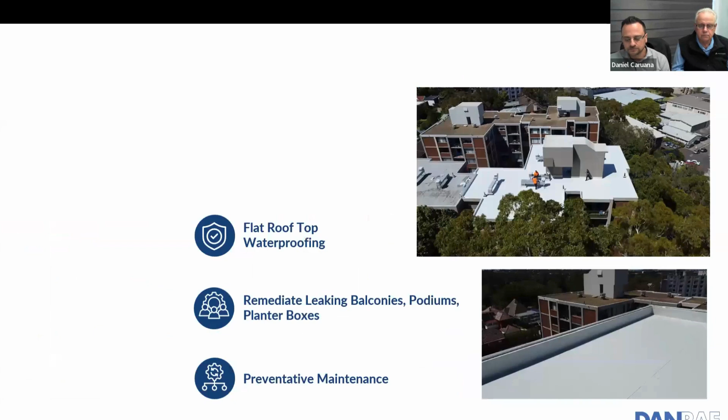And we work generally in New South Wales, Canberra, now Melbourne, and we work across various industries: strata, commercial, and government. Yeah, so I've just been through that. Adding to that, we also do preventative maintenance as well. So we do regular checks on membraned roofs to ensure their compliance and that long-term warranty periods are still viable.

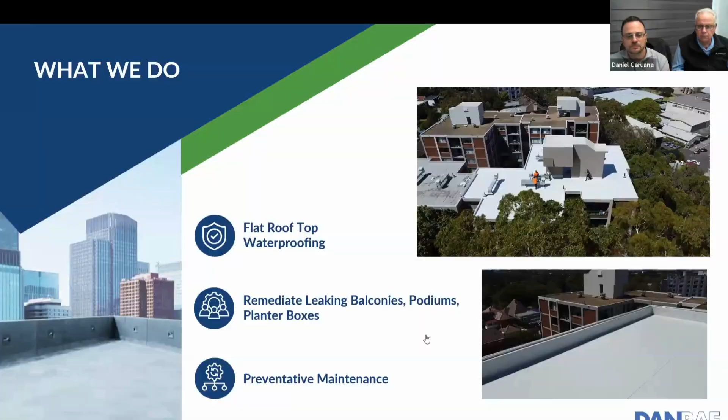My special guest today is Mr. Ron Caruana. If you haven't noticed already, it's actually my father who founded the company. G'day, Ron. How are you all? I'll let Ron give the quick intro. Yeah, as Daniel mentioned, I'm Daniel's father. I started Dan Rae originally with my wife, and as we went along, Daniel came on board, and Renee, my daughter, as well.

So they've actually taken over Dan Rae and are running with it now, and I've branched out with another company called Waterproofing Compliance, where we look into new buildings and remedial buildings, but make sure that new buildings follow the new act and comply with both the Australian waterproofing standards and the NCC. And then we sometimes get involved with remedial work where we investigate issues on existing buildings. I've been in the game for quite a while, so I know quite a bit of the problems that happen on buildings.

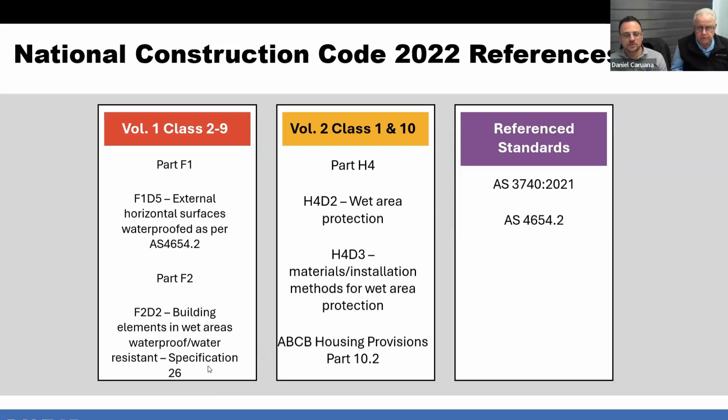Externally, correct. So to go deeper into that, what are the specific standards in waterproofing? As mentioned, AS 3740 is the internal standard for design and installation of internal wet areas, right? So bathrooms, laundry, etc., all your wet areas internally.

AS 4858 is actually the standard to which a membrane must be tested for use in internal areas. Why that's important is every membrane must be tested to a certain class, and I'll cover that in a minute, of essentially how much it stretches, the extensibility of a membrane, and whether it can be used in an internal area.

And they also do tests on the actual membranes themselves, chemical tests that could happen in a bathroom, for example in the shower, using bleaches and things like that, and how they withstand those typical normal use areas. Yep. And then you've got AS 4654.1, which is similar. So it's the standard that the materials or the membranes are tested to for use externally above ground.

And then you've got AS 4654.2, which is the design and installation for a contractor to install those membranes. At the moment, there's no Australian standard for below ground. However, they're looking at adopting the British standard 8102 for below ground waterproofing.

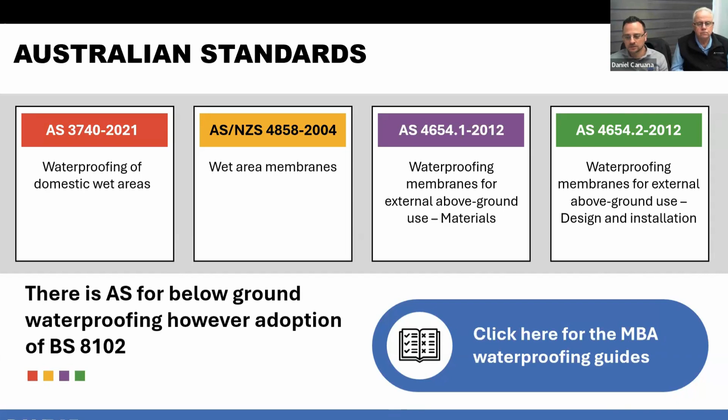Okay, so in the standards, what are the terms used in regard to waterproofing? First one, there's been misconception around interchanging of certain terms, and I wanted to put some clarity around these terms. So a waterproof material is one that does not allow moisture to penetrate that material, as opposed to water resistant, which doesn't degrade if water enters the material.

The reason I bring this up is that concrete is considered to be water resistant. A lot of the time in construction that term is interchangeably used with certain substrates, so it's important to note the difference. And then the waterproofing system is a combination of the building system to ensure there's a waterproof barrier. So that's important as well. It's not just the membrane itself. It's actually a full design of the system.

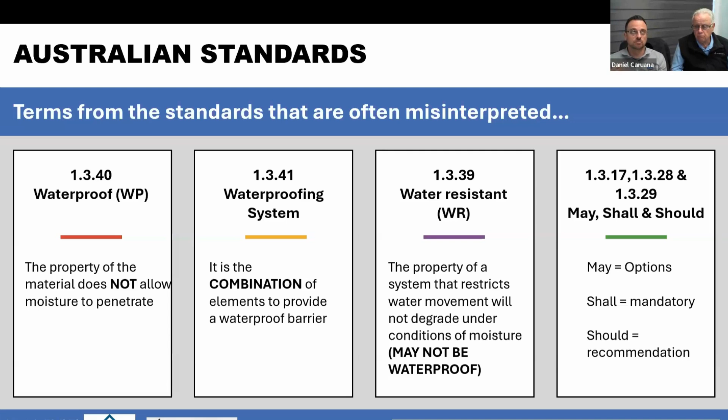And then there are terms that are also used, which are may, shall, and should. For example, you may get a sentence that uses either of those terms, and that essentially indicates whether it's an option, mandatory, or a recommendation. An example would be in the external AS 4654 standard, it says that there shall not be ponding on a roof or on a substrate, but it should have a 1 to 100 fall. That's just one example. So in short, it's important that those terms are interpreted correctly.

Yeah, so this slide shows the classes of membrane and their extensibility. Do you want to talk to that one about different types? Yeah, well, generally the membranes have their actual class ratings, right? So when you pick a membrane for a particular job, it's got its class rating on it, depending where it's going to be used. And basically, they rely on the elongation, in other words, how much it can stretch before it actually tears or cracks.

Okay, and what it is too, the lower the class, the more corner fillets you need to have, different sizes that will allow the membrane to work better. For example, the liquid membranes do not like a 90-degree transition between the horizontal and vertical. So it's very important to look at what class membrane you've got and how these are treated.

In some cases, if you're getting a class 1, it's a pretty extensive corner fillet, up to about 75 mil I think it is on a class 1, which is tremendous. So some suppliers will recommend possibly using a bandage in the corner, and that will give them the flexibility they need in the corner to comply with their requirements. It's important that you look at that. And again, the different classes of membrane, which Daniel's got there on the side, the class 1s, 2, and the examples of them.

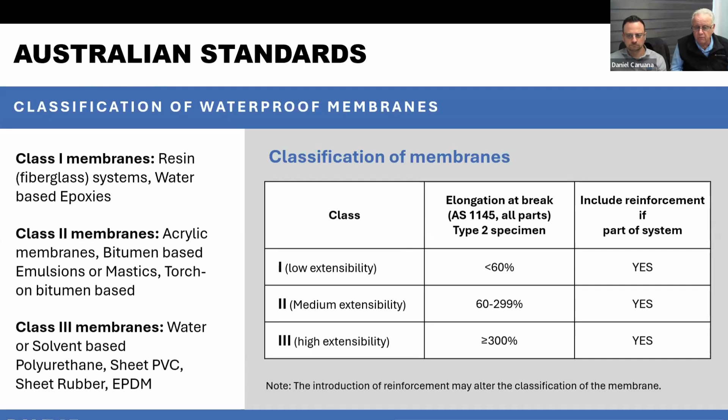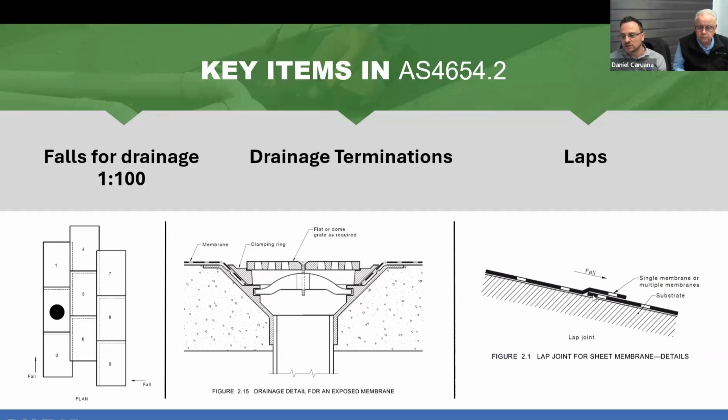It should be laid in a brick fashion, with the lap of the membrane falling towards the drain. And with drainage points, we find this is quite common on older buildings where they don't use a clamping style drain that actually clamps the membrane and pushes it against the substrate on the drain design. I've already mentioned the lap. So the fall should fall to the drain as well.

Terminations. This is a diagram out of the standard as well. For sheet membrane, this is a preferred termination where you essentially reglet cut into the vertical wall or parapet wall, and the membrane system is then inserted into that cut. As you can see here, this diagram has an overflashing. That can be done with certain membranes as well. Some membranes have a weldable profile that the membrane welds onto in that situation. Do you want any other comments on that?

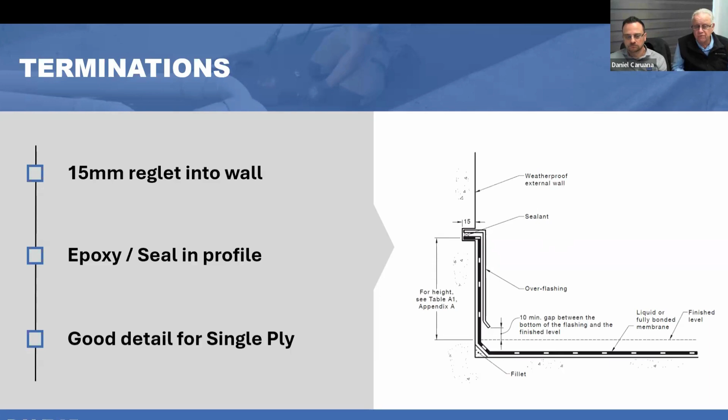Yeah, this is the preferred method because some terminations rely solely on sealants, and they've only got a lifespan sometimes of about 2 years, maybe 3. Yes, I'll show you this one. Yeah, that's the one I'm talking about. Sometimes they say not to cut into the wall, however, this type of pressure seal system relies extensively on the sealant. And as I mentioned, that's only got a lifespan of about 2 or 3 years generally, which means maintenance comes into it and you need to check them and redo them.

Yeah, so this detail from the standards is typically used on a torch-on, where the torch-on will turn up the wall, the profile is fixed to the torch-on, and then sealed off with a sealant. A common defect we see is actually the wrong sealant used on the membrane. For example, a polyurethane sealant, which is not ideal to be used with a bitumen membrane. And like Ron said, it's very reliant on the sealant as your main waterproofing barrier on the upturn.

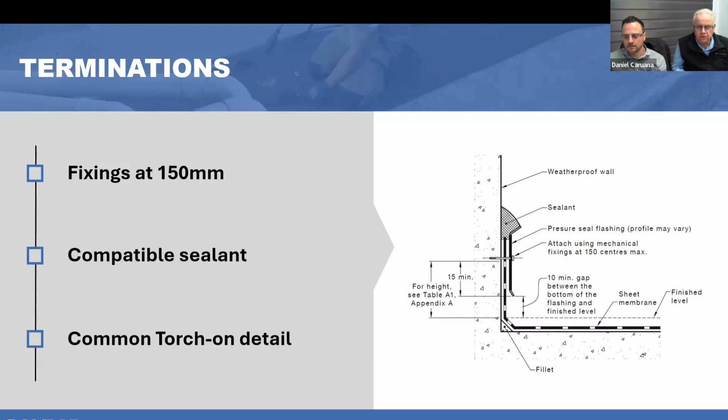Yeah, there's got to be a separation between the sealant and the torch-on. With torch-on being bitumen, they have a reaction. So you need to use the correct sealant for the correct membrane, basically.

Okay, balcony detail. A very common defect that we see on balconies is along the door threshold. The diagram on the left is straight out of the standards on what a typical membrane installation would be, as you can see by the dark dashed line there. Most waterproofing, unfortunately, only turns up the vertical face and doesn't go under the door threshold. In remediation situations, a lot of design consultants will ensure that the waterproofing turns up underneath the door threshold. That's why the doors have to come out.

So that would be the ideal detail. I've drawn the red line there. That's essentially where the common fault occurs, along that joint where a cold joint will form due to building movement. I don't know if you want to comment more. Yeah, on the door threshold, that fault Daniel's showing with the red line: some of the hobs are poured later. You can either have a hob that's poured in situ with the main slab or added after, and that's a common problem with the after effect, okay?

Because the hob moves and cracks, and if the membrane is not suitable, it will come through there. Another problem is the waterstop angle is now installed under standards, but it wasn't installed before. So if there's an issue or a problem with the door, it'll work in that area there. It'll leak through there.

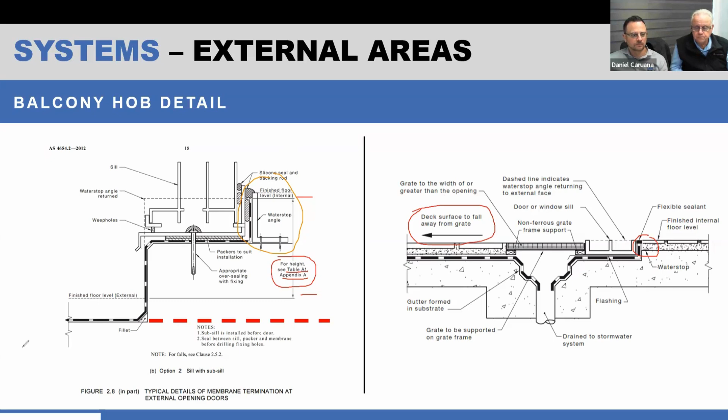Let me hopefully clear this. That's all right. Okay, planter boxes. Oh, let me just give it.

Planter boxes. So this is planter boxes. While they look nice, they're obviously a problem in a lot of apartments and apartment complexes. So this is straight out of the standard as well. And as a remedial contractor, and I'm sure Ron also, we've probably never seen a planter box designed this way. No, I don't think so. In an actual construction environment.

So one of the common things we see would be the issue of the soil height versus the membrane height. Often the membrane finishes below the soil height. We see that quite a lot, and obviously then you're getting moisture drawn into the parapet wall or the upturn. And we never see this design done either, where the membrane carries up and over and outside. But I don't know if you want to talk about how that's detailed correctly in a normal build. Well, yeah.

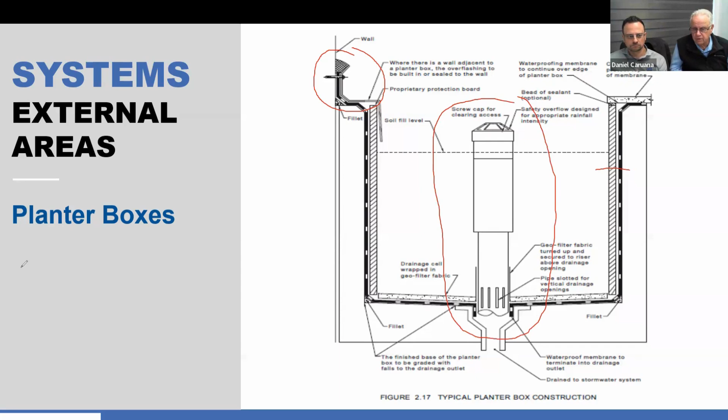Yep. Awesome. Okay. All right.

Internal wet areas. So specifically in internals, I want to reference a couple of the terms in the standard too, because these are new in the 2021 internal standard. They've increased the definitions of a lot of terms, which is actually really good. So for those that are new to liquid membrane and the terminology used around that, the dry film thickness is the finished thickness after the membrane cures.

There's a lot of misconception when applying liquid membrane. A lot of contractors aren't actually testing the thickness. That's in the built environment, new build especially. They're not getting the correct thickness when they've finished a liquid membrane installation, which is essentially what we test for.

When the contractor is actually applying the membrane, there's what they call a wet film thickness gauge, which they can use to test the application or do spot checks while they're applying the membrane. However, a lot of contractors don't use it or don't know how to use it properly, because a lot of the membranes

like, for example, a water-based membrane could have up to a 50% evaporation rate to get to the dry film thickness. So you might apply 1 millimeter thick wet, but it'll end up being 0.5 dry. And if the supplier wants a 1 millimeter finish, that means you need to apply basically 2 millimeters wet to get to the final thickness.

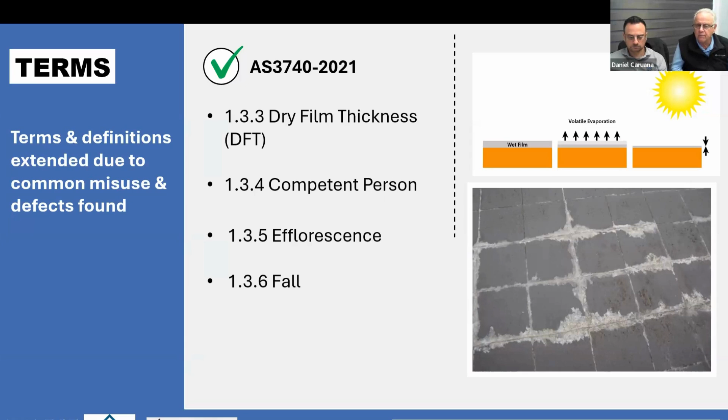So our job as a compliance consultant, basically a waterproofing consultant, is we go out to site after the membrane's been applied and do checks using ultrasonic meters. Sometimes we do destructive testing if we're a bit skeptical about the situation, and then do a report accordingly. But we find a lot of the thicknesses are out.

The other issue I've included in here is the stages of curing time. Liquids go through certain stages of curing. If it's not fully cured and that membrane is covered by either a screed or some other form of bonded final substrate, this process can reverse, which is called reemulsification. Essentially water or moisture gets reabsorbed back into the membrane and it turns back into its original form.

That's where we find that issue happens in new build, where they're really pressed for time and they're getting other trades in too quickly before the membrane's fully cured.

The other small thing I'll mention is the internal standard does actually specify the membrane over or under the screed, not both. So your primary membrane must be over or under the screed in the Australian standard. And your main membrane has to have a fall. It's not illegal to use two, but it's not mandatory. You use one or the other, as long as the membrane falls to the drain. That's the most important one.

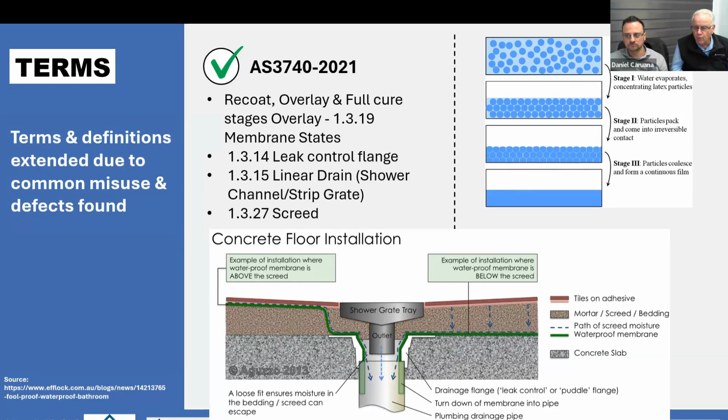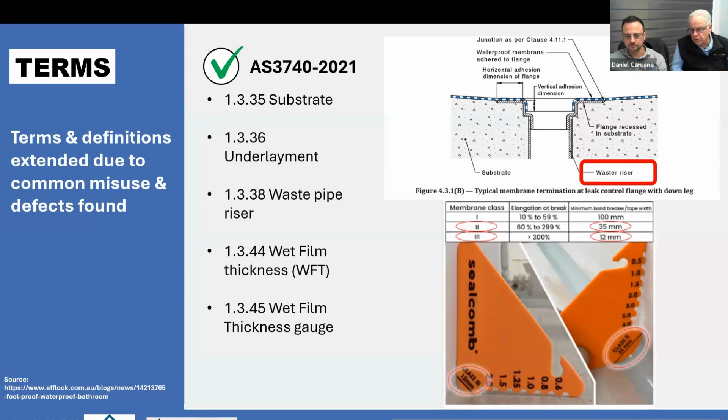And these were the gauges Ron was talking about for testing the wet film thickness during installation. That's what you would use, some kind of wet film comb. Those combs show the notches for wet film thicknesses, and the corner shows you the fillet required depending on the type of membrane. Right, I'll skip these.

Oh yeah, internally the Australian standard has also classified three categories of risk. For example, high risk would be in the shower itself, moderate is outside or adjacent, and low risk is no falls required. So they're the categories they've put in place to govern the falls in internals.

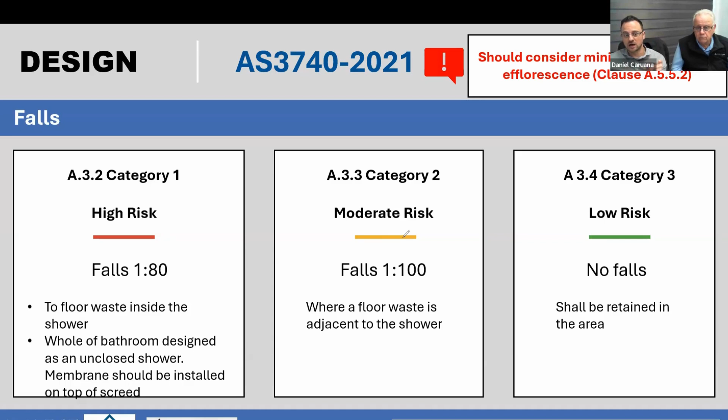The last thing in internals, one of the major issues is the water stop angle in the shower. We find that in construction, a lot of the times the height of the water stop angle is not sufficient, but the tilers have gone over that anyway, and so it allows water to escape the shower. You've seen your share of internals. They just put any angle, and the tiler goes ahead and tiles everything, and you can't find the angle.

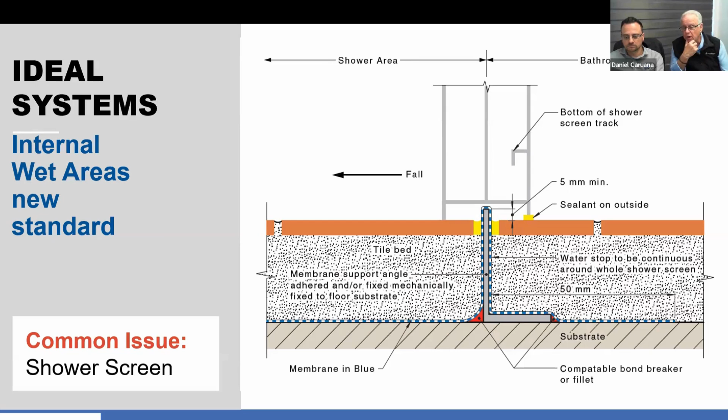And what happens is moisture tracks along the tiles, underneath the tiles, across the top of the angle, and in some cases they've even tiled it higher than the door angle, which means it travels outside the actual wet area, which is a very, very big problem. So again, while we're engaged to go and check all these things, we pinpoint and highlight these issues that the builder has to rectify. Otherwise, it's too late.

So pinpointing a pinhole in a membrane, it's very effective. It uses water to spread over the membrane, and the water will track into any voids. It sends an electrical current, low voltage, and it makes a contact between the water penetrating into the earth of the building. That's how it works, and then sends off a signal. So it pinpoints defects in laps and holes, and it's very effective in doing that.